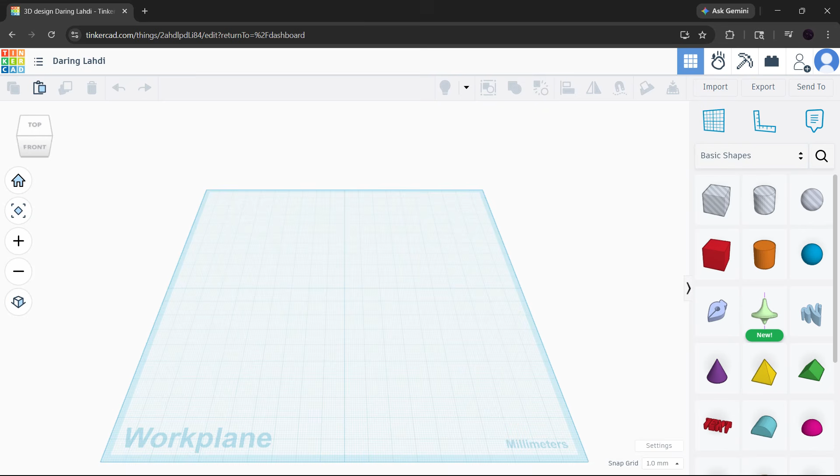All right, let's jump right in. First, open Tinkercad and create a new design. Once you're on the work plane, we're going to build the base of the keychain. From the Basic Shapes panel, drag a box shape onto the work plane. This box is going to be the main body of your keychain, so we want it to be flat, clean, and easy to print. Now, use the corner handles to resize the box into a thin rectangle.

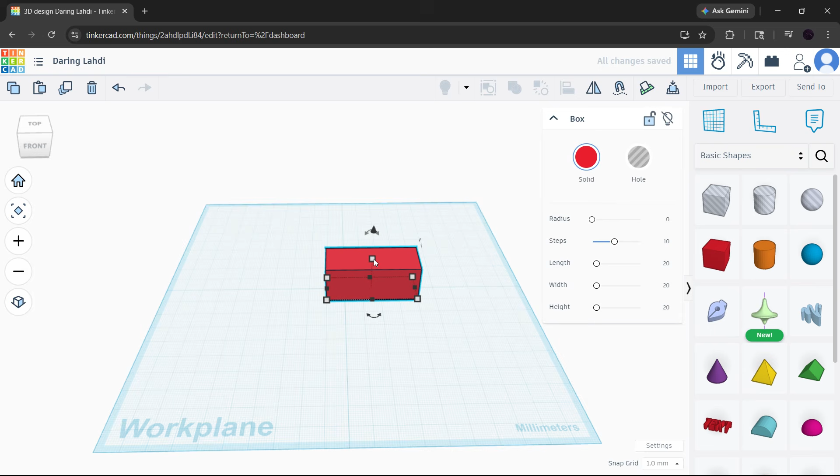A good starting size is around 50 millimeters long, 20 millimeters wide, and 3 millimeters thick. You can change these measurements depending on how big or small you want your keychain to be, but this is a great size for a standard name keychain. Make sure the base is not too thin, because it still needs to be strong enough to hold up on a keyring.

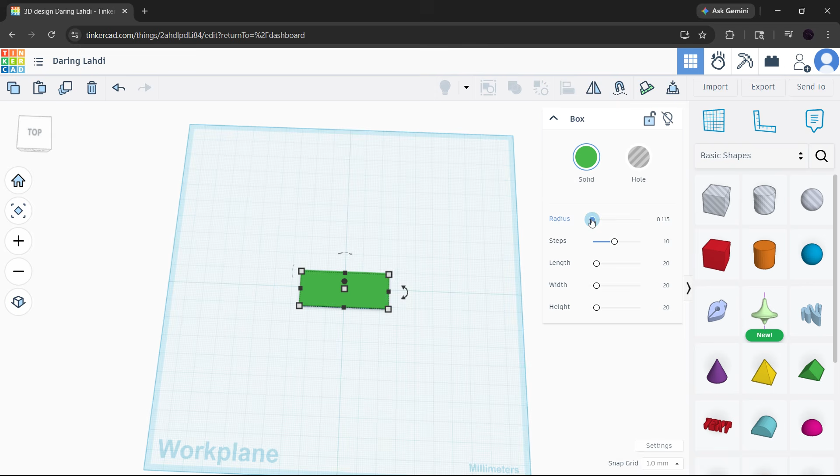If you want your keychain to look a little more polished, here's a great pro tip. You can round off the ends by dragging 2 cylinders onto the work plane. Make sure the cylinders are the same height as the base, then snap one to each end of the box so they smooth out the corners. This gives the keychain a more professional look and makes it feel less sharp. Once everything is lined up, you can group those parts together to form one smooth base.

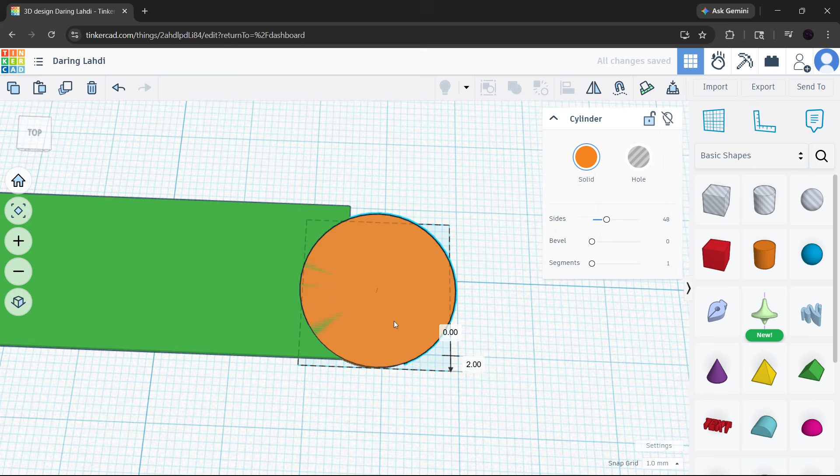Next, we're going to add the name. Go back to the Basic Shapes menu and drag the text component onto the work plane. This is the part that makes your keychain personalized, so type in your name in the inspector window. You can also choose a different font depending on the style you want. Some fonts look bold and modern, while others look more playful or elegant, so pick one that fits your design.

After that, resize the text so it fits nicely on the base. You want the letters to be large enough to read clearly, but not so large that they go off the edge of the keychain. A good rule is to leave a little space around the text so the design feels balanced. Once the name looks right, drag it onto the base and position it where you want it.

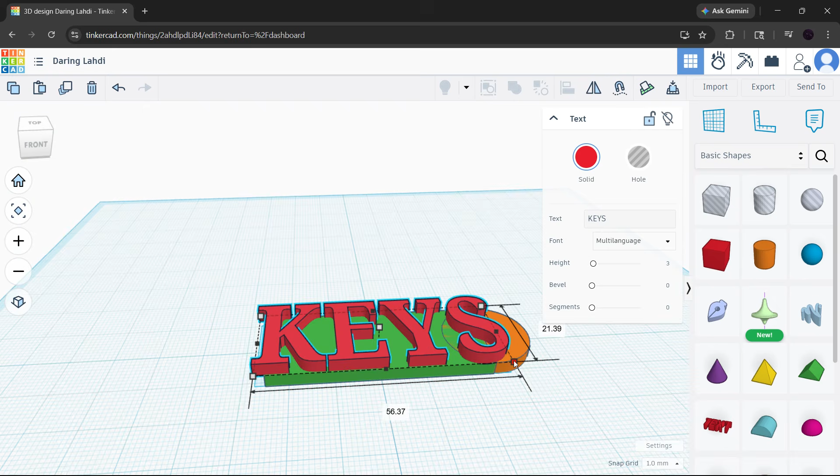Now, this part is important. You can either place the text slightly on top of the base so it stands out as raised lettering, or push it down into the base if you want an engraved look. To raise it, use the black cone handle to lift the text just a little above the surface. To engrave it, lower it slightly so it cuts into the material. Both options look great, so choose whichever style you like best.

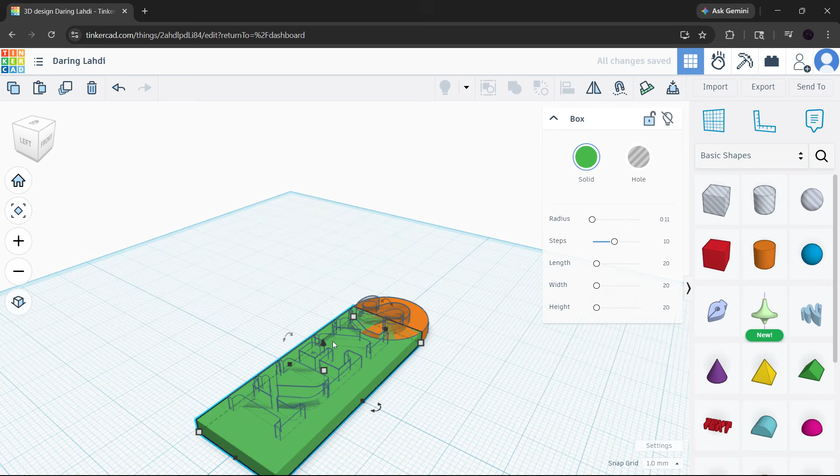Now let's add the keychain hole. Drag a cylinder hole onto the work plane. This hole will be used to attach the keyring later, so placement matters. Resize the cylinder so it's about 4 to 5 millimeters in diameter. That size is usually strong enough for printing, while still being large enough for a ring or clasp to fit through. Place the hole near one end of the base. Try to keep it close to the edge, but not so close that the printed keychain becomes weak.

After placing it, select both the base and the cylinder, then press L to use the Align tool. This helps you center the hole properly so the design looks neat and balanced. Make sure the hole is aligned the way you want before moving on.

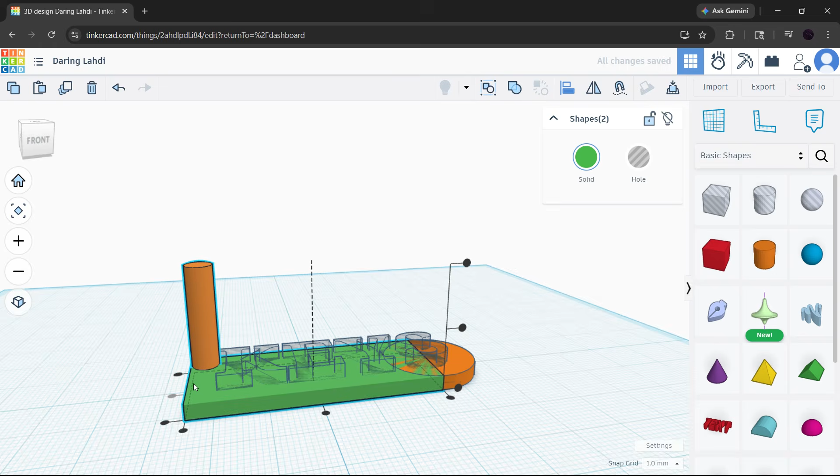Once everything is positioned correctly, it's time to finish the model. Select all of the parts, including the base, the text, and the hole. Then click the Group button, or use Ctrl+G on your keyboard. Grouping combines everything into one final design and applies the hole cutout properly. If you want the text to appear in a different color in the preview, you can click the solid color circle and enable multicolor, which makes the design easier to visualize before printing.

After that, your name keychain is basically complete. The last step is to export the file so you can print it. Click Export and choose STL as the file format. STL is the standard format for most 3D printing and slicing software, so this is the best option if you're planning to print your keychain at home or with a 3D printing service.

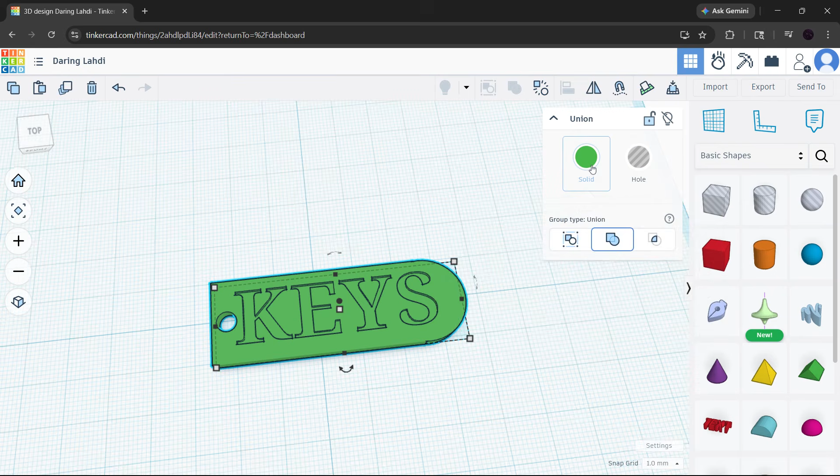And that's it. You've now learned how to make a name keychain in Tinkercad from scratch. This is a great beginner project because it teaches you how to use basic shapes, text, alignment, grouping, and export tools all in one simple design.